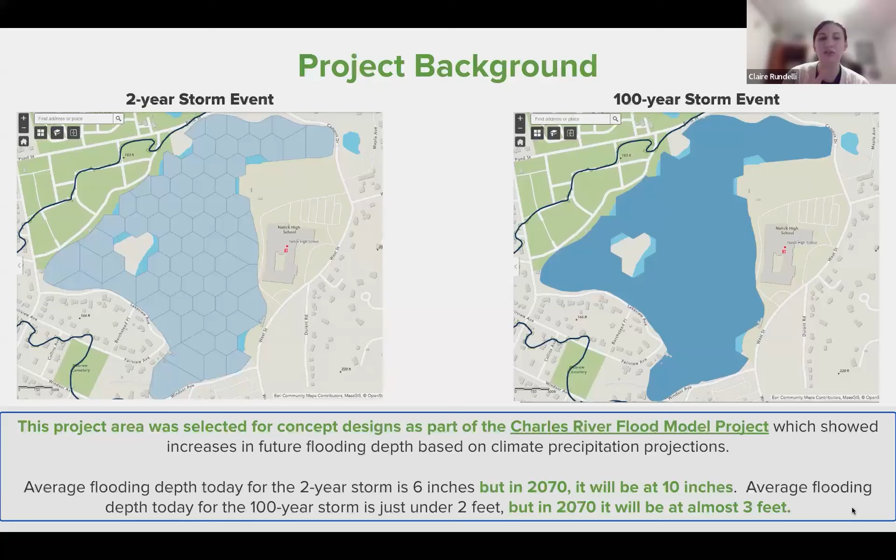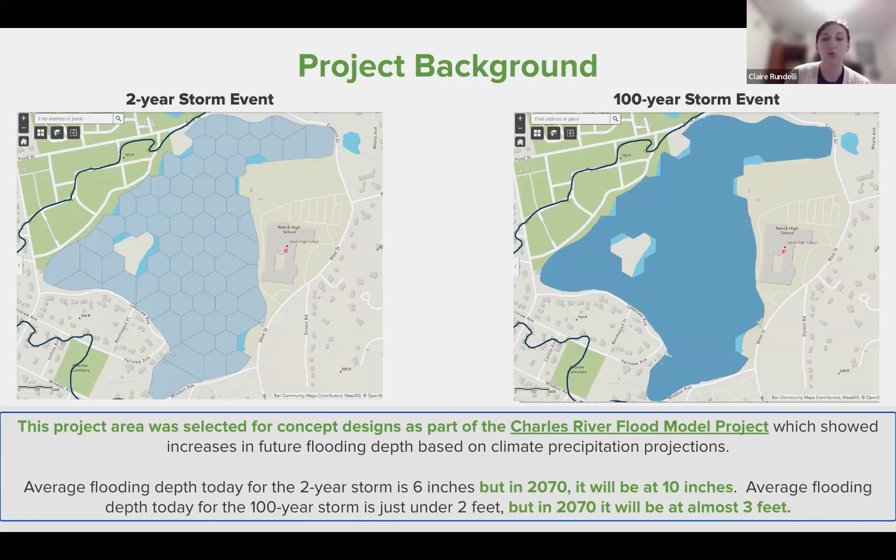And if the animation works, Carly, if you hit next slide, will it change? Oh, look at that. So the previous image that we saw was today's flooding depths. And what we see now on the screen is the flooding depths for the 100-year storm and the 2-year storm event in 2070. That timeline seems really far off, but these changes happen on a nonlinear basis. We know that this is going to be potentially a regular occurrence of flooding in 2070, but we know now that this flooding is still possible. And so in looking at the depths, next slide, Carly.

It may not seem like a really substantial change in flooding depths in the 100-year storm event, which is a storm that has a roughly 1% chance of happening in any individual year. We go from a 2-foot flood depth to a 3-foot flood depth. And that is the difference between the changing station and bathroom house at Memorial Beach being flooded and it being

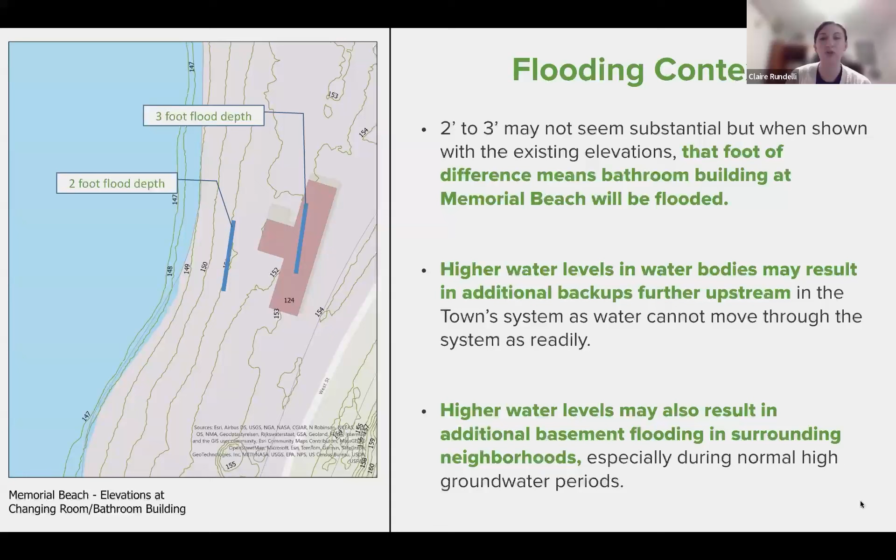dry. So it doesn't seem like a huge change in depth, but when we look at our infrastructure and other factors, residential homes, roadways, bridges, culverts, even those small changes can have a really significant impact on that infrastructure. Next slide.

Now, why was this area specifically chosen? Natick has so many water bodies in our community, all of which experience issues, flooding, water quality. Why did we choose this spot specifically? There were a couple of reasons that this area was selected by the flood model. And a lot of that had to do with the potential impacts that this area had on a larger area of Natick. The first reason that this area is chosen is because it is within the Charles River

watershed, which is obviously a limitation of the model that we've been working under, though there are several efforts by other communities and other watersheds to develop similar models for those water bodies. We looked at this area because we saw an opportunity to improve the flooding situation on a real world scale.

You can see that this watershed stretches on the southwest side, roughly about halfway down Route 27, right before Rockland Street, just about. And it stretches then all the way up and all the way back to Marion Street, just past Natick Center, and that large wetland system that sits behind the Community Senior Center.

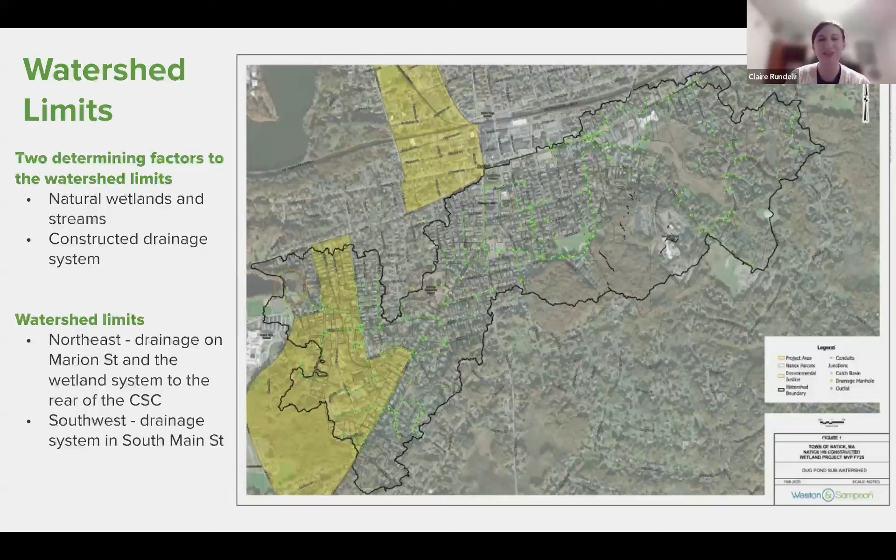So upwards of 150 acres of watershed is draining to this singular point in town at this settling pond at Dug Pond. And there's obviously going to be some water that runs off in other places, ends up puddling in folks' backyards. But generally, all the water that's hitting our streets within this watershed is ending up in this small little settling pond. Next slide.

So if folks are familiar, you're driving down West Street, it turns into Campus Drive, and you notice there's a little sort of gravel parking pull-off just on your right, and there's maybe a gross looking little pond that you see right there. And that is what we're referring to when we refer to settling pond. So this area, it wasn't necessarily designed for that purpose, but it has become almost a de facto area where water has an opportunity to sit before going under Campus Drive into Dug Pond.

We've got 4 major project components. The primary one is designing a stormwater treatment feature at the settling pond and facilities yard that provides not only water quality benefits, but flooding mitigation and improved native vegetation.

We also understand that one treatment feature at this singular location is probably not going to address the problem as a whole. So we are also taking a look at that large watershed that we just showed on the prior map to see where there are other opportunities in that watershed to provide additional infrastructure improvements, be they green or gray infrastructure. So at the settling pond, we're really focusing on green infrastructure, not only because of the water quality

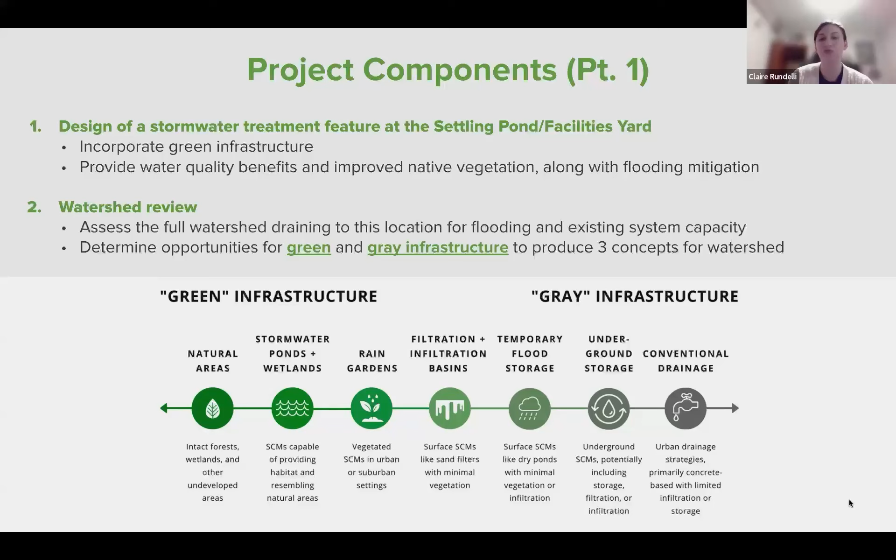benefits that it provides along with flood mitigation, but also because we are very aware that this location is in close proximity to the high school and has an opportunity to potentially provide educational opportunities to the students as well. But throughout the watershed as a whole, where space is potentially more of a constraint, there's existing infrastructure, roadways, all of these competing factors, we are also taking into account gray infrastructure to be able to fit improvements into our existing system. Next slide.

Part 3 is an evaluation of that existing settling pond. Folks who may have been in town for a while, I heard this first from David Ordway on the Open Space Advisory Committee, that pond was dredged back in the 80s. All the sediment was removed from it.

And as ponds naturally do, especially ponds that receive this volume of stormwater runoff, a lot of that sediment has returned to the pond. Erosion from folks' yards, sediment and debris like sand that's put down for salt or for ice management, all that sediment gets washed into our storm drains and gets carried to this point. And so there's quite a bit of sediment in this existing pond.

Not during the drought last year, but the drought year of 2022, you could almost walk across it. It was so dry out there. It looked more like a mud flat than anything. And so we're going to be assessing that pond for dredging opportunities in the future.

Dredging is a very expensive and permit heavy process to go through. So we really want to make sure that the town is fully understanding the feasibility of that dredging, so that way we can make the most appropriate decisions on how to address the sediment that's ended up in the pond. And finally, part of what we're doing here tonight, part 4 of our project, is outreach and engagement.

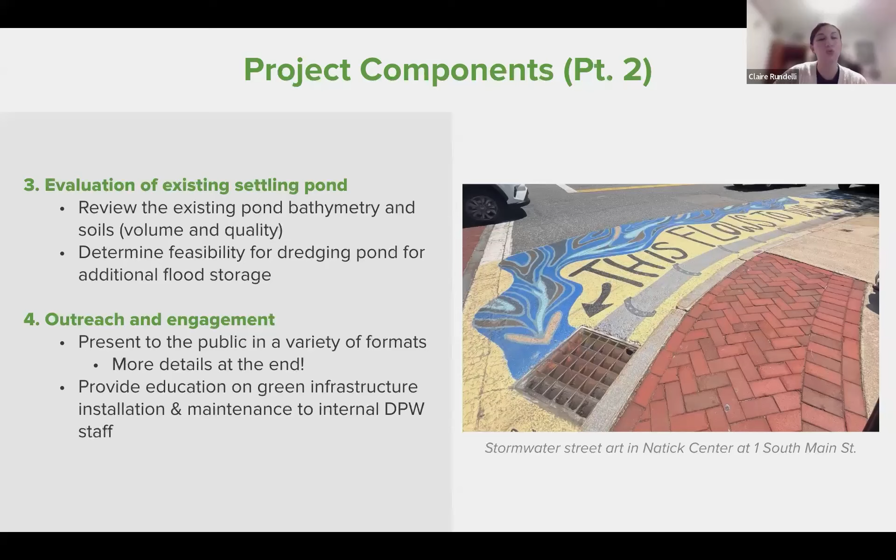Other opportunities for you guys to join us on this project. We're going to be hosting a public walk on May 3rd from 1 to 3 p.m. And that walk will take us a little bit through that watershed that I showed you, so that way folks can have an opportunity to really see where the water is coming from that's ending up in this pond. And then we'll have an in-person public meeting on May 20th, location and time to be finalized. And then our project will complete at the end of June of this year.

We have a 1 fiscal year grant from the Municipal Vulnerability Preparedness Program. We're really lucky as a town to have benefited from a number of MVP grants. And we really are excited for this opportunity to move forward from the sort of concept design of the project, which was also funded through an MVP grant, to this permit ready design phase of the project. Next slide. Back one more. Oh, there you go.

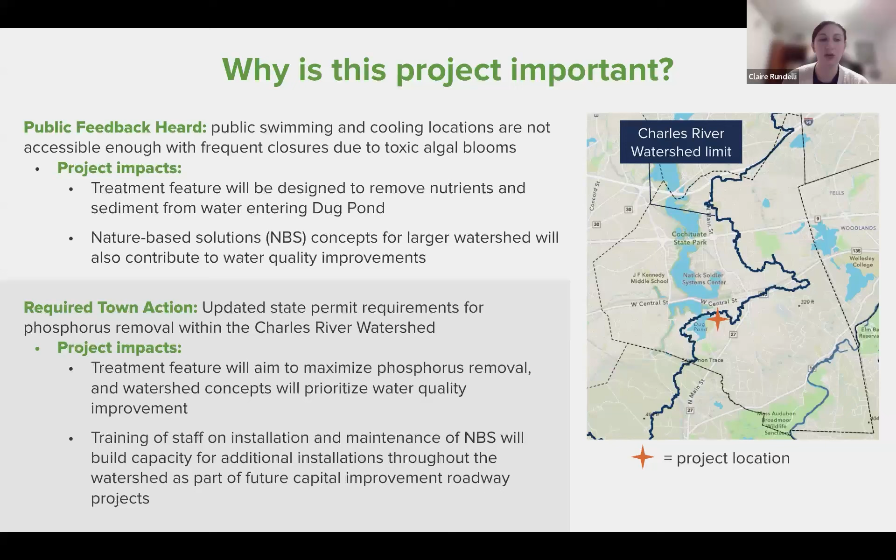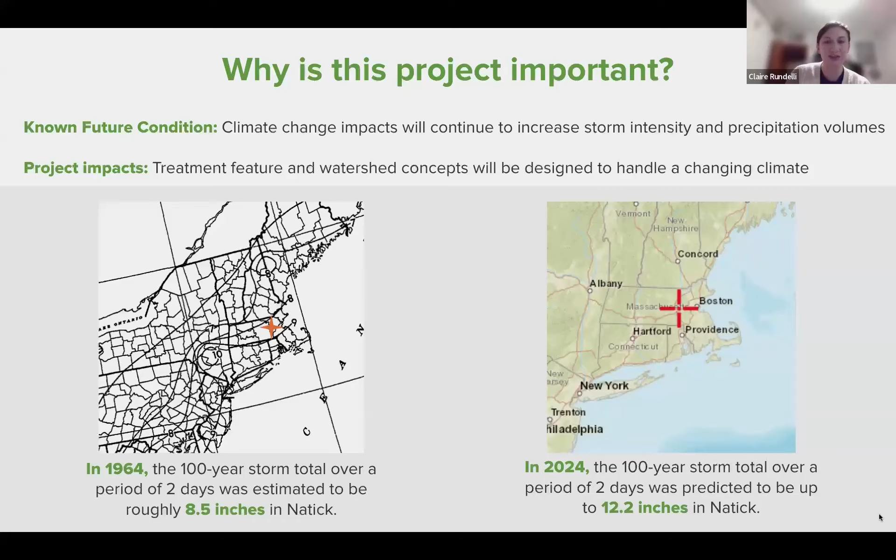And if folks remember 2023, when we had 2 4-inch storms back to back in December, that's a lot of water coming down. And so, again, it seems like small numbers, but when you think about it in that larger context, it has really substantial impacts. Next slide. And here I'm going to turn it over to our partners at Weston & Sampson, Alex Simpson, to get into a little bit more of the technical details about our project components.

Thanks, Claire. So now we're going to talk through some of the components of the project itself, talking through the actual design pieces that we're working through. And so to start with, we're going to talk through the design of that stormwater feature that Claire had mentioned at Dug Pond and near the high school.

Next slide, please. So before we get into what we're thinking for the design, we want to talk through what these different components of the system actually mean. When we're talking about gray infrastructure, we're talking of the journey of the water going through the gray system. The water is picking up pollutants on the ground. So we have these rain events, it rains, it hits the ground, and then it hits the road typically or some other surface. And then it runs downhill, so to speak.

And then it enters into what we call our gray infrastructure system, typically at a curb grate or a catch basin. You'll hear it called a couple different things, but it hits that system, goes down in there, enters that structure, and then it goes into the pipe. And then that system filters down through the watershed and ends up at Dug Pond in this case for this project. So when you're walking around Natick, what you're going to be seeing on the road is all these catch basins, and that's all interconnected for the gray infrastructure system.

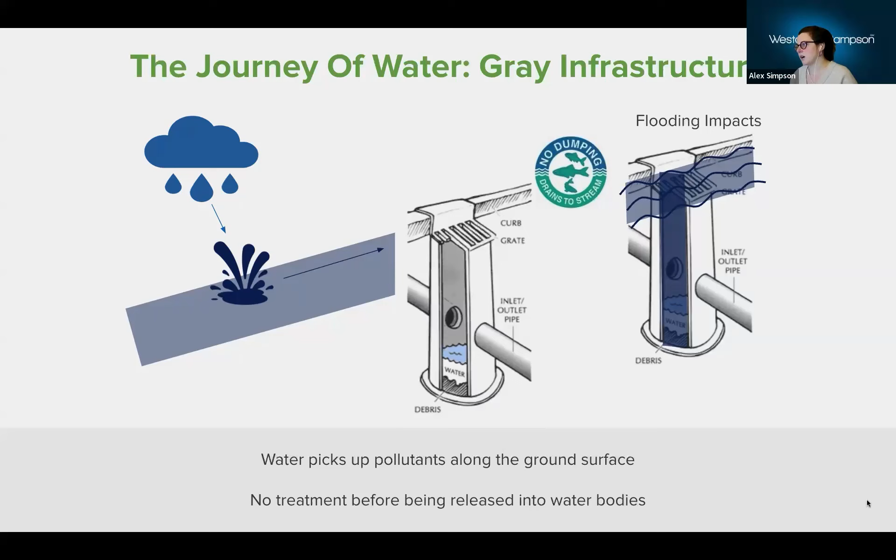But the real takeaway here is that the water is hitting that ground, it's picking up whatever is there, but there's no treatment being done to that water as it goes into the system. And so when it hits Dug Pond and that settling pond, that's when we can have some of the issues Claire mentioned. Next slide, please.

And so what can we do instead of only relying on gray infrastructure? That's when we look at green infrastructure and nature-based solutions. I know there's a lot of text here, but really what you need to know is that green infrastructure involves treatment of that stormwater. It's how do we infiltrate, which means we have that water going back into the ground, back into that system, and how do we clean it up before it gets discharged back into Dug Pond for this case. We're looking at a couple different types of green infrastructure and nature-based solutions for this project, and we'll show you some of those options in the next slide.

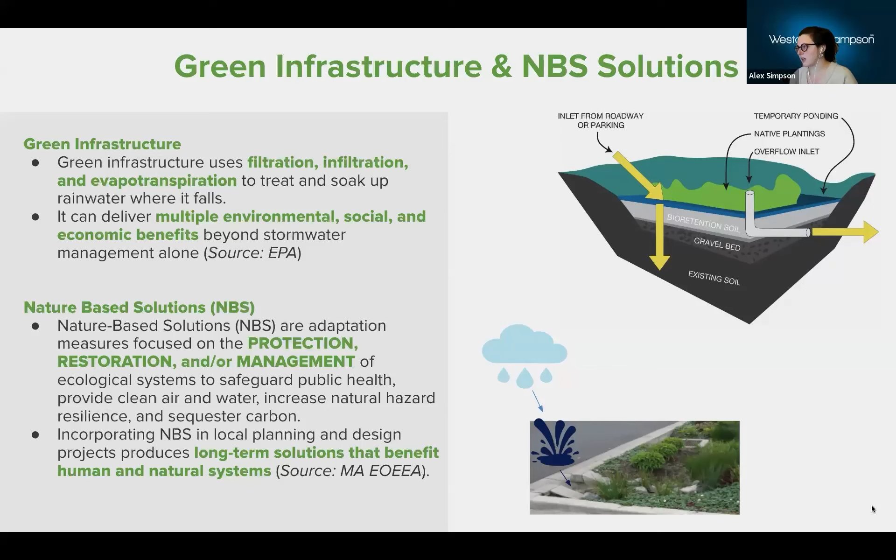Oh, sorry. And so, like I said before, the benefits of green infrastructure are flood reduction, water quality improvements, and urban heat island reduction. If you're not familiar with that, if you're on a paved road with no shade, think about how hot that is. Whereas when you're in the grass, it's much cooler, much more refreshing. So if we can incorporate these systems that have some of those green spaces but are also giving us that water quality, we can have that co-benefit of heat island reduction.

We get ecological habitat. Having more grass, more plants, bushes, trees brings pollinators, animals, bugs and everything else, and that increases the ecological diversity in these more paved settings. Maintenance reduction: the gray infrastructure, that catch basin I was just talking about, needs to be maintained. Some of that sediment that gets picked up on the road goes down into that system, so how do we maintain that? With these green infrastructure systems, often some of that sediment can get filtered out before it goes into the gray infrastructure system, and that can be a net positive.

It can also increase property values. If you see just a paved road with no green space, that's not as attractive. Having these green spaces intermingled within your community can really make it nicer. So there's a lot of co-benefits involved in choosing these types of systems versus traditional gray infrastructure. Next slide, please.

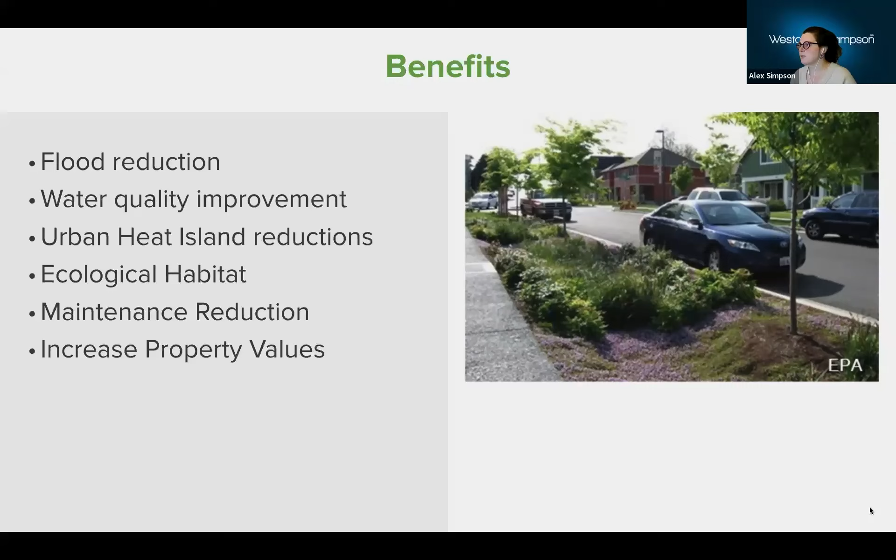And so, all this is to say is we're looking at doing these types of green infrastructure systems at the Natick High School, specifically at that facilities yard that you can see called out below. So to the southeast here, just north of the facilities yard, there is an outlet that Claire was talking about previously, and that discharges all of that water that's in that gray infrastructure system right into the settling pond.

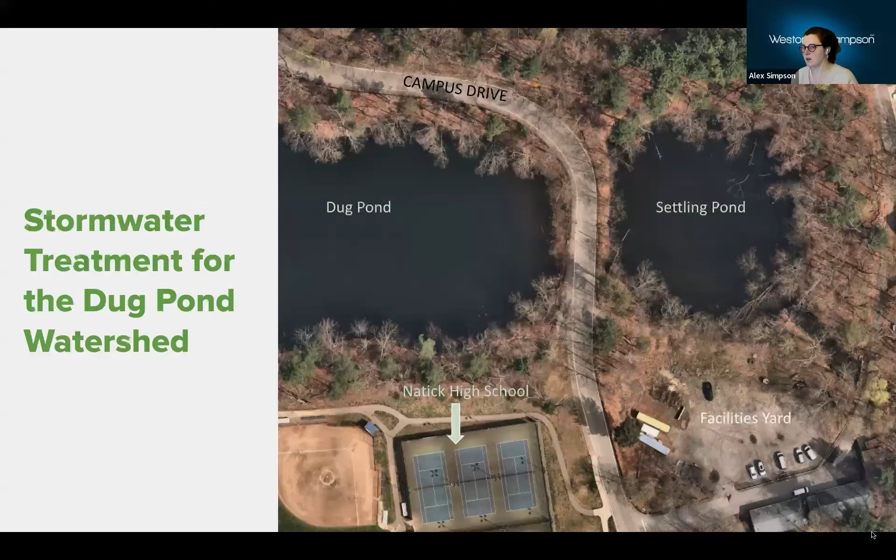And like Claire said, this has been dredged before. It gets a lot of sediment. It's getting a lot of material brought into here. And so we're looking at how can we intercept some of that water and actually treat it so it can be cleaner as it goes into that settling pond, which then goes into Dug Pond, which can then have all these other positive effects. So this picture is just so you can see everything in relation to itself. But if you go to the next slide, please.

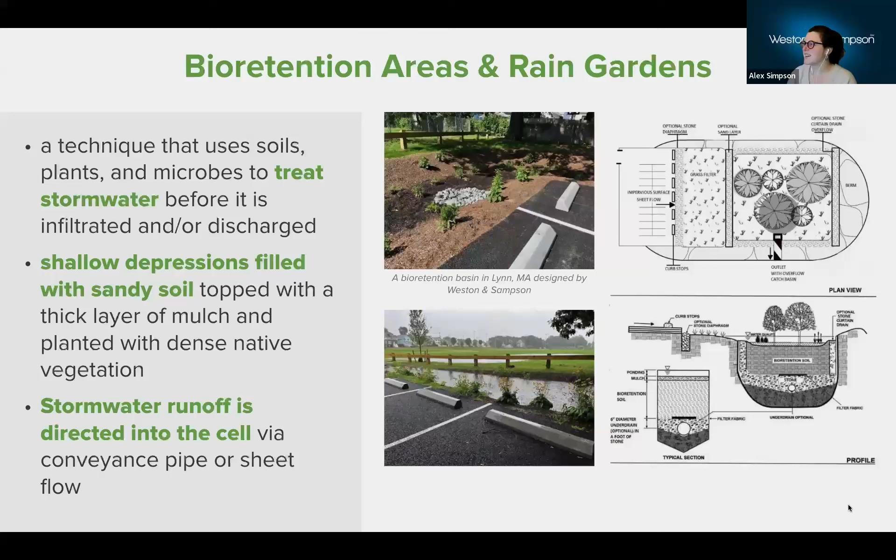So the next one is a constructed stormwater wetland. And so these can take many shapes and forms. Different communities have installed them, super effectively. You might have heard of the Alewife stormwater wetland or the Reading constructed wetland. So those are just some more local Massachusetts options. But really what a wetland does is it's a large area that can capture a lot of water and provide a lot of treatment. And so it's trying to replicate what we see out in nature, which is a typical wetland, just we're constructing it here for stormwater mitigation.

And so you have shallow pools, you have a lot of plants, you're trying to replicate the natural environment, and you're just capturing that water, allowing it to meander through, filter through the different pools or plants, and then eventually it will outlet back into the settling pond. But you've effectively slowed it down and added a lot of time before it hits the settling pond. And so that's the benefit of a constructed stormwater wetland.

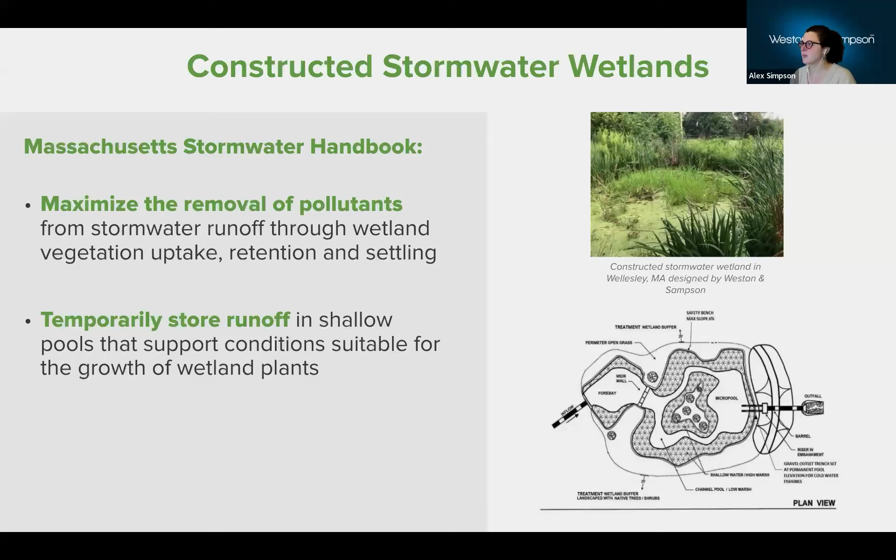Next slide, please. And so we've talked about these two different kinds of green infrastructure, but there's not just the kinds, there's also the scale. And the scale really can change what you're doing with the green infrastructure. And so we just want everyone to know what that can look like at different scales, because it can be very different than what you're expecting.

And so for small scale green infrastructure, we're talking typically in the right of way, typically smaller and more compact footprint. And so you can see some of the examples below, but we're talking under 20 feet wide with a variable length, just put where we can fit it. And so this is what some of those solutions can look like. Next slide, please.

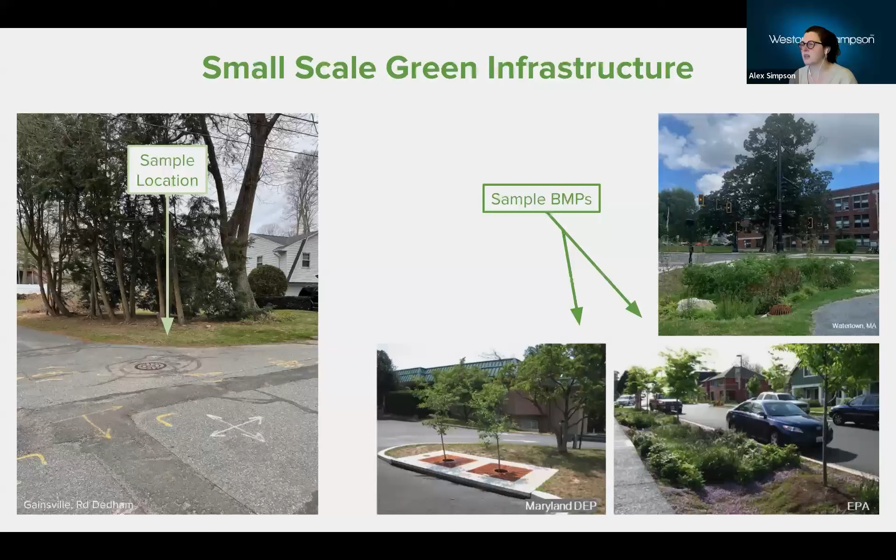And then on the other side of it, we have these large scale green infrastructure systems. A lot of times people see these and they don't even understand that this is actually a stormwater feature, and this is doing a lot of work to help improve your water quality. So these are another one of the options we're looking at: how big of a practice can we install at this location to try to capture as much water as possible and provide the

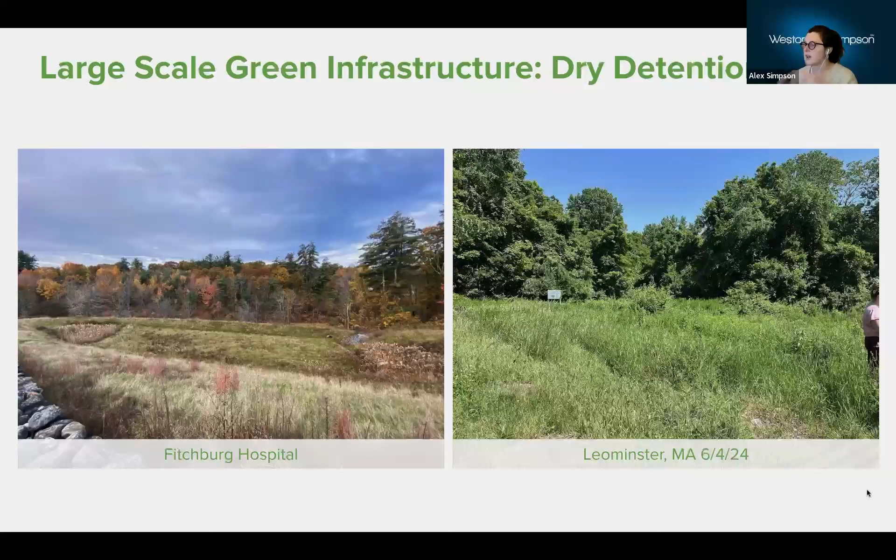Next slide, please. So now I'll pass it over to Janet. We've kind of gone through some of the ideas we're looking at for the settling pond, but we're still working through that process. So if you do have any feedback or any thoughts, definitely let us know.

Thanks, Alex. Hi, everybody. I'm Janet Moonan from Weston Sampson. I'm a senior project manager supporting Alex with design on this effort and coordinating with our modeling team. So I'm going to cover how we're assessing the watershed beyond the specific area right around the high school and thinking about that larger watershed. So next slide.

We have been doing quite a bit of data gathering. It's so important to get this information in person and directly from folks that are living through and experiencing storm events in Natick. So we've had a visit to the site specifically and walked around the watershed area that Claire showed on a previous slide. We completed what's called test pitting, and that's really where we're looking at what are the subsurface soil conditions and how favorable are they to us putting water back into the ground, right?

Alex was talking about infiltration. How much can we do there? And we did that specifically around the facility site at the high school. We didn't do that throughout the whole watershed, just the high school so far. And we've really gotten quite a bit of feedback from the public as well as DPW and facilities on where the town has experienced flooding throughout the watershed. Next slide.

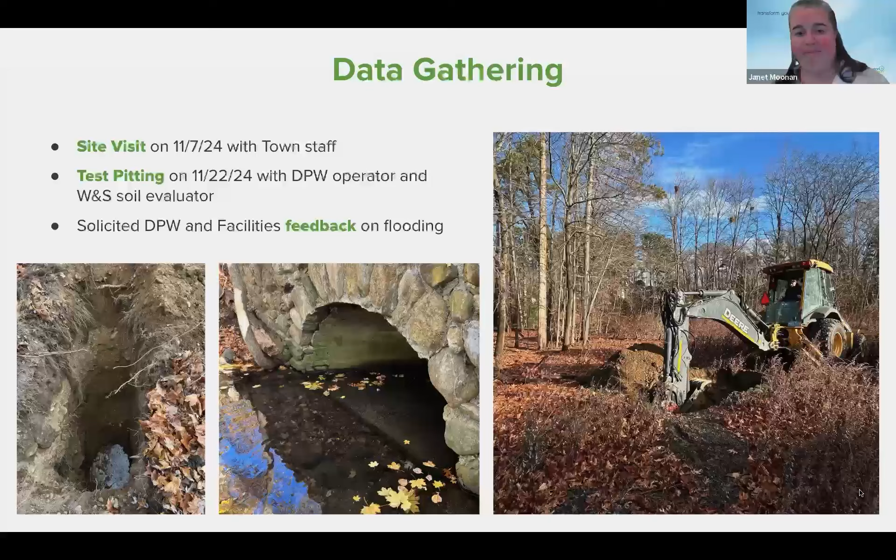What we've done is worked towards developing a hydrologic and hydraulic model of this watershed. We're using mapped information from the town of Natick, and that includes the stormwater system, right? So where are catch basins, where are drain manholes, how are the pipes connected, how big are they? We're also using that Charles River watershed model that Claire mentioned, and that was a bigger project that's ongoing and is benefiting many communities across the watershed.

We also have gone out into this area and looked at a number of critical locations where we really needed to understand what was going on with elevations and connectivity, and take measurements. And we've used LiDAR, which stands for light detection and ranging. Basically, it's a phrase you will hear when people talk about topography or elevation or contours. So we're understanding what is the elevation of the surface, how does water flow uphill, downhill, and where are the uphill locations. So we're combining that information into our process. Next slide.

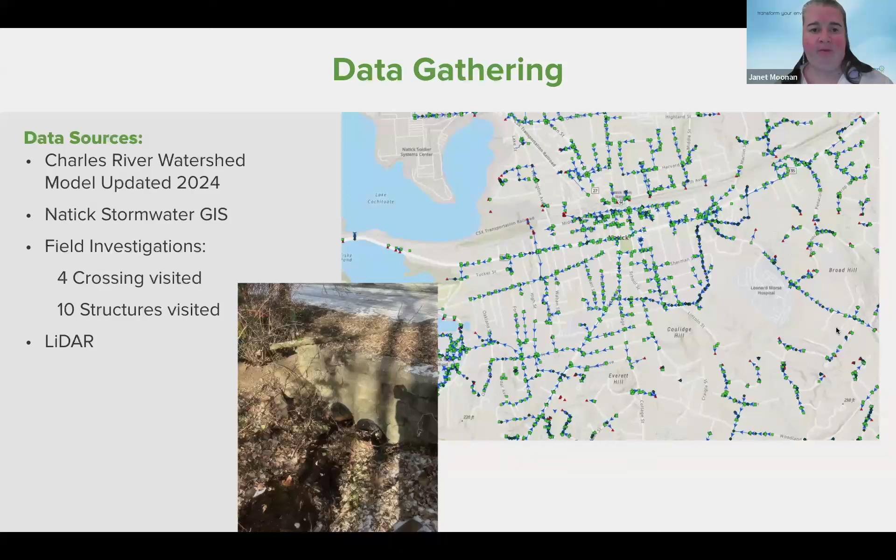And all of that goes into the one-dimensional model development. The one-dimensional model is reflecting all of the pieces of where water falls and flows. You can see on the left side of this slide the various model elements. I'm not going to read all of the components, but we've done a very discrete and thoughtful process to understand connectivity of water to Dug Pond, where the reported problems are, and where potential future problems might be from additional precipitation due to climate change. Next slide.

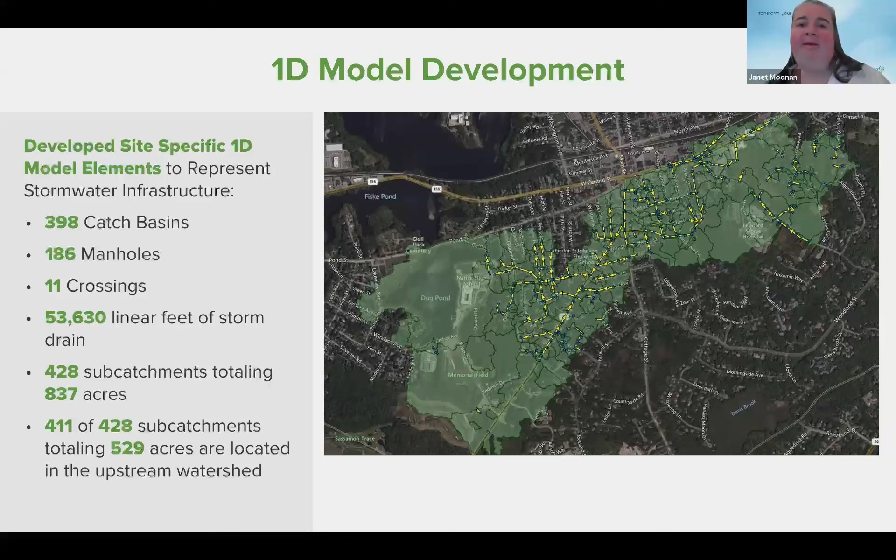And then we develop what's called a two-dimensional model. The best way to think of this is it's helping understand where does it flood? How far does the flooding go? How deep is the flooding? It's showing where water kind of puddles and stores, and where water is flowing into that pipe system that was on the previous slide. And it's really helping the town understand what this looks like dynamically when you have different storm events. So that is really honing in and being able to focus on specific areas and answer questions about that dynamic flooding. Next slide.

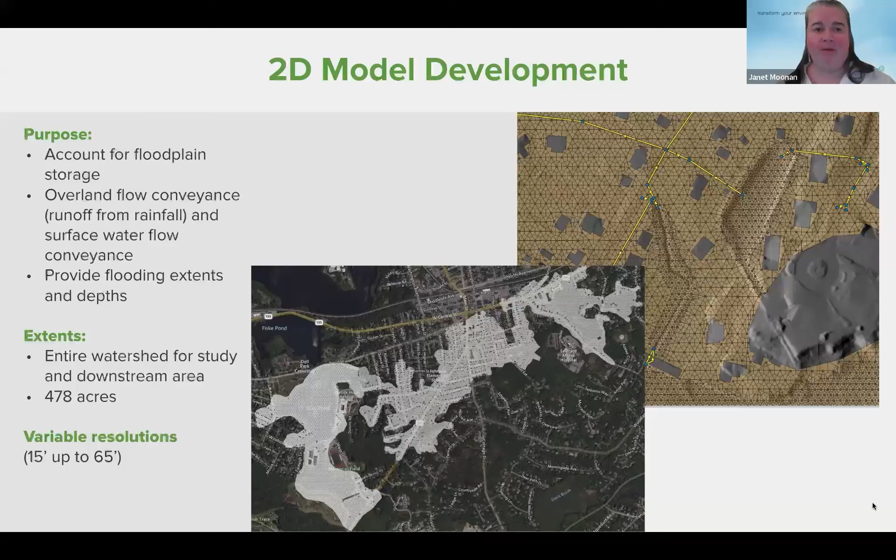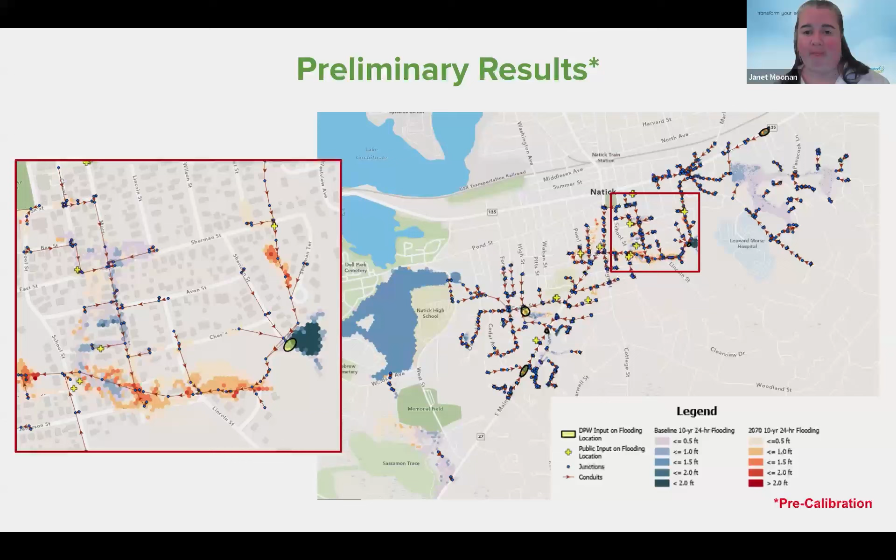But so you can see visually what this model looks like, right? Where the rain, where the flooding is, how far it goes, who it might impact, etc. Next slide.

We're undertaking a whole assessment of the watershed to identify where we can employ nature-based solutions in conjunction with gray solutions, as Alex and Claire had talked about. And there's a multi-step process here. We're looking at plans, reports, understanding capital projects around sidewalks and roadways, redevelopments. We're looking at the data that we've organized and reports, the model results.

We're thinking about topography and the existing drainage infrastructure and parcel ownership, and thinking about where is best to put these nature-based solutions or green infrastructure practices, trying to size those for the location that we're installing, and making them practical and buildable, not take up parking or space that's necessary for the community. We're thinking about, how are they constructible? Are they feasible? And we will be working through a process with the town to prioritize those locations.

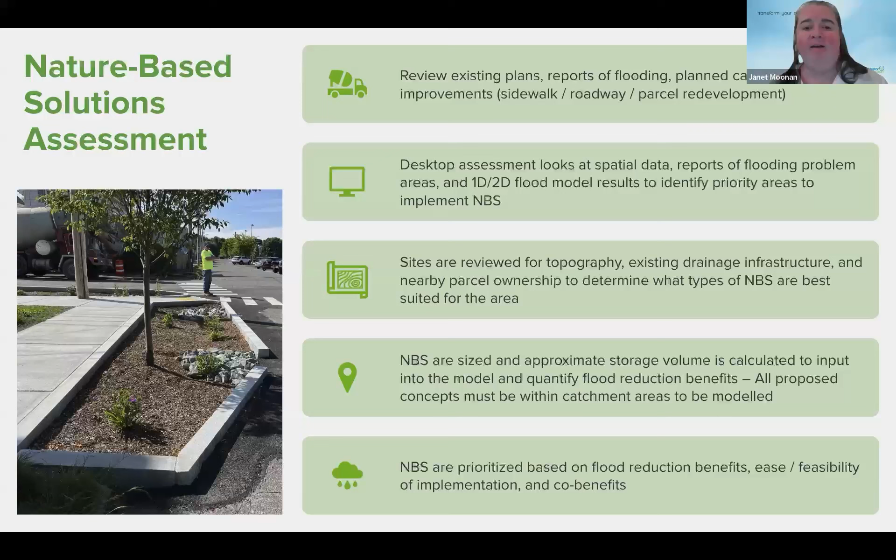And one of those pieces will be on how well they do to reduce flooding, how well they reduce pollution, how feasible are they to care for or maintain, and also the co-benefits that Alex talked about. Next slide.

Our overarching goals of this watershed assessment are to think about the biggest projects and the most bang for the buck, right? We want to be cost effective for Natick and have practices that are going to help reduce flooding and reduce pollution runoff. We're also going to identify those small and medium scale projects, though, that really can be part of longer term planning or integrate into roadway work.

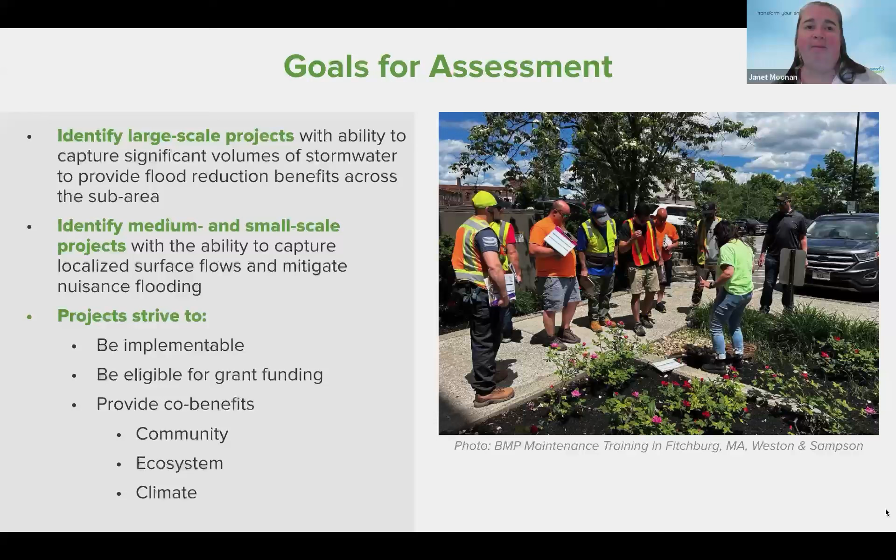But really, like I said, we want to be able to build these. We want them to be fundable. It's challenging as a community to get enough money for these, and there are grants that are available. So we're trying to make these as competitive as possible. And we are thinking about all those co-benefits to the community, to the ecosystem, and to the climate, mitigating climate. Next slide. And with that, I'm going to turn it back over to Alex.

Thanks, Janet. So the next part of this is looking at the existing settling pond. So we've talked through the stormwater treatment option at the high school near the facilities yard that will ultimately feed into that settling pond, we've talked about some of that mitigation and interventions that we can do kind of upstream in the watershed to reduce what is coming into the settling pond. But now the next phase of work is also looking at how do we evaluate that existing settling pond and what does that look like? Next slide, please.

And so to do that, we're first going to just kind of look at it and review that existing pond. So we're going to be looking at, you know, the bathymetry and the soils. And for anyone that's not familiar, bathymetry is essentially those contours in that LiDAR that Janet was talking about. We're looking at that under the surface of the water. And so what does the bottom of that settling pond look like when it's totally dry? So if you happen to be around during the drought, you might have gotten a glimpse of what some of that bathymetry actually looks like.

And so the first step is just understanding what does the underlying surface look like here, and how does that compare to what it used to look like, or what does that look like, you know, post dredging in the 80s. And so kind of understanding what does that bottom of the pond look like. And then we're also looking at the soils. So is there contamination? What type of soil is it? Is it super compacted? Is it full of organics? Just what is the composition of that soil that is kind of at the bottom of that settling pond?

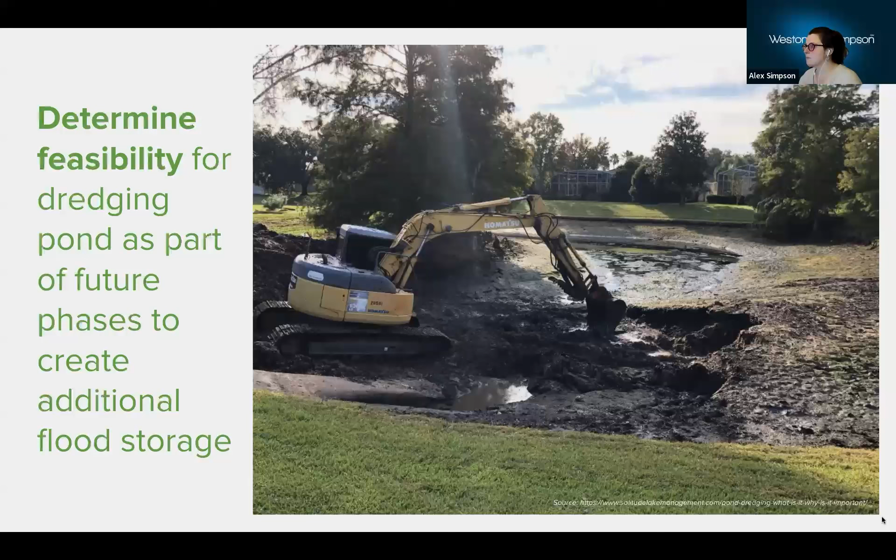And so those are kind of the design phases of the project. We've talked through kind of all three of those. And so what are the next steps? Claire's talked about this is an MVP project. So we are trying to finish by June 30th per the grant. And so before that happens, we are going to be calibrating our model based on the different flooding areas that we've gotten, the survey results. So thank you everyone that did do that, because that's super helpful for us, making the model be as accurate as possible. We're going to be doing the GSI screening that Janet talked about.

So we're going to be reviewing the watershed, seeing what we can put there and seeing what kind of benefit it can get. And then we'll be looking at the stormwater treatment design at the facilities yard, like we talked about. And so we're waiting on survey. Once we get that, we'll be working through what does that design look like? What can we actually do here? And how much treatment can we get? Because ultimately that's what we're trying to maximize.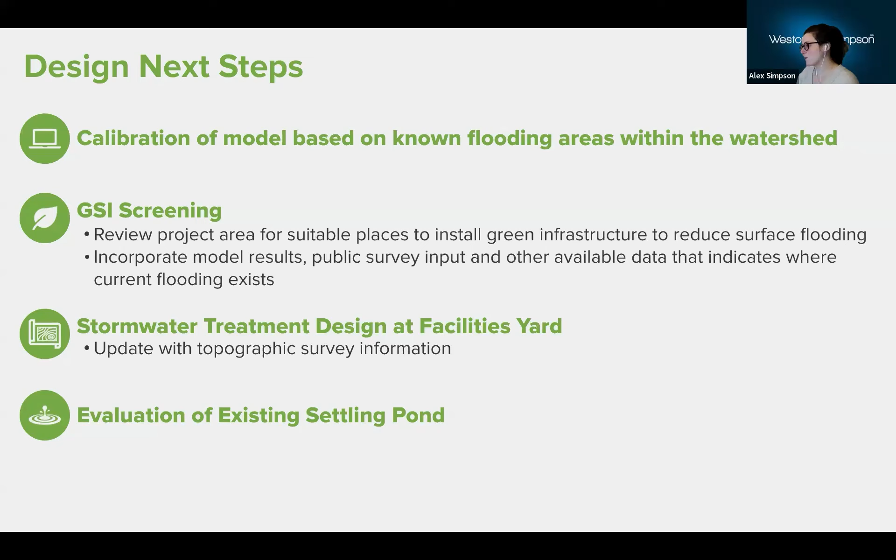And then finally, like I just said, the evaluation of the existing settling pond. Can dredging be done here? Is that a good option? And what would that look like? So that's all to come. And Claire's going to talk later on more touch points on how to get involved in these next phases. So that's it for the design, and I'll pass it off to Claire.

Thanks, Alex. I'm going to spend a little bit of time now talking about how you all can really have an impact on this project. We really strive when we're designing these kinds of features to really engage with the public, because we know a lot of these terms, green stormwater infrastructure, sustainability, and it can be hard to justify why these things are important to our community. But we hope that tonight's presentation has really demonstrated to you all the sort of larger scale view that we're trying to apply to this project, and how we really hope that it is not going to only improve Natick as a community, but also the Charles River watershed as a whole, even on a small scale. Next slide, Carly.

So community engagement, Alex mentioned the survey responses. We did have 58 survey responses. Thank you to all the public participants who were involved. The full calibration hasn't been completed yet, but some of the responses we weren't super surprised by, which I think was really great sort of confirmation that we were seeing things that needed to be addressed in certain areas of the community.

I think one area that really stood out to me is the Presidentials neighborhood, for folks who are familiar with that, the neighborhood behind Town Hall, where there's a lot of built infrastructure. There's not a lot of lawn space. There's a lot of roofs. There's a lot of active construction projects, resulting in maybe what green space there was now being disturbed during active construction.